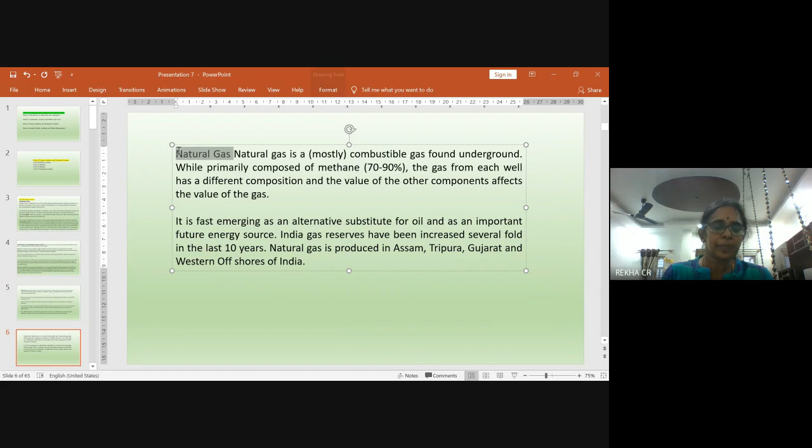The third one is natural gas. Natural gas is a combustible gas found underground, and primarily it is composed of 70 to 90% methane.

So the gas from each well has a different composition, and the value of other components affects the value of gas. Natural gas is a fast emerging alternative substitute for oil and an important energy source for the future.

India's gas reserves have increased several fold in the last 10 years, and natural gas is produced in Assam, Tripura, Gujarat, and western offshores of India.

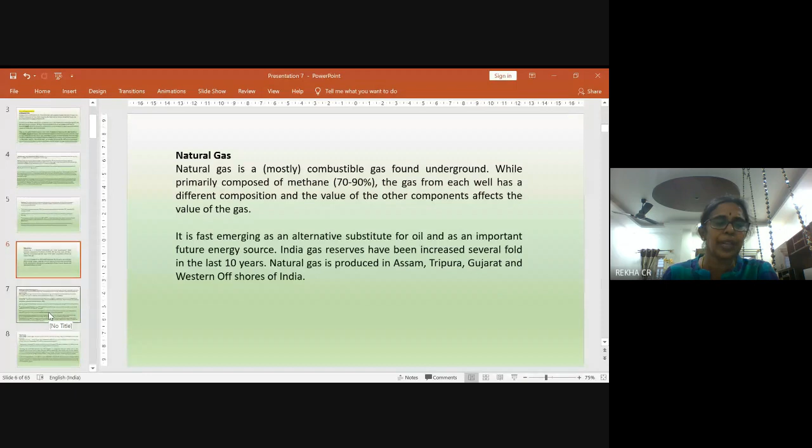Next, coming to renewable energy technologies or renewable energy sources. The one we studied earlier is non-renewable. Renewable energy sources can be renewed, like solar energy, wind energy, geothermal energy, tidal power, hydroelectric power, biomass, etc. The first one is wind energy.

It is an important alternative technology due to developments in turbine technology. The power generated from wind-based turbines has increased significantly. Wind energy is one of the clean and sustainable energy resources.

Though windmills are utilized for energy generation, the development of new windmills, also called wind turbines, appeared as early as 1890. Today, wind-generated electricity is very close in cost to power from conventional utility generation in some locations.

In wind energy, the wind turbines use the kinetic energy of the wind and convert it into mechanical energy, which is then converted into electricity by a generator. Large windmills are generally grouped together in a windy area, called a wind farm, which makes it easier to feed the produced electricity into the power grid.

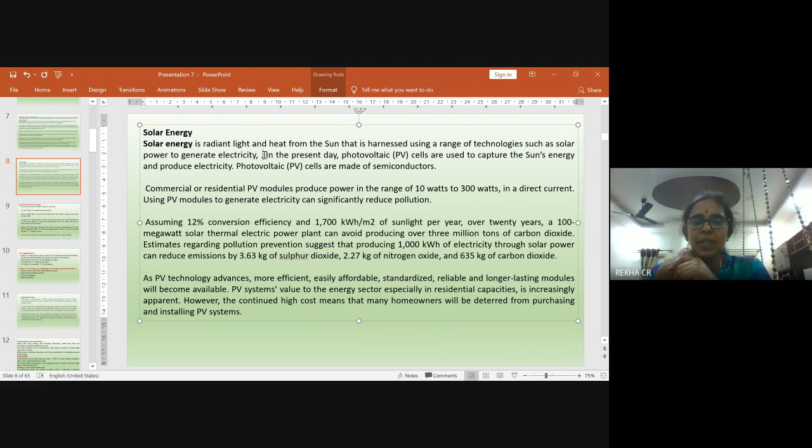As PV technology advances, more efficient, easily affordable, reliable, and long-lasting modules will become available. PV systems' value to the energy sector, especially in residential capacities, is increasing.

Next is photovoltaic technology. Photo means light and voltaic stands for electricity. So SPV refers to sunlight-derived electricity. When sunlight falls on special cells called solar cells, electric voltage and current are generated.

A single solar cell generates 1 watt of useful power, and even more depending upon its conversion efficiency. The power thus generated is fed to the battery and can be drawn whenever required.

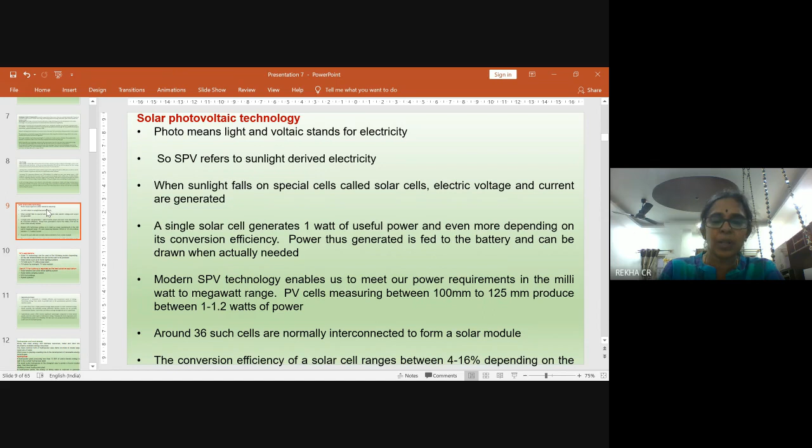SPV technology enables us to meet our power requirements. PV cells measuring between 100 to 125 millimeters produce between 1 to 1.2 watts of power. Usually 36 such cells are interconnected to form a solar module. The conversion efficiency of a solar cell ranges between 4 to 16%, depending upon the cell technology used.

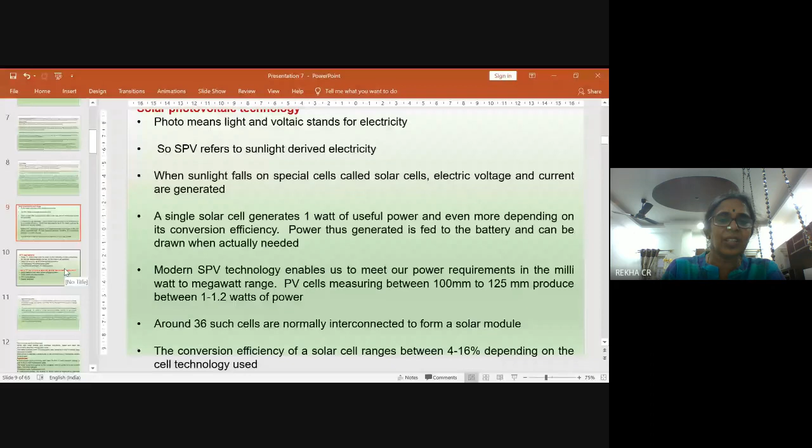This SPV technology is used depending upon site characteristics. It can stand alone in home lighting systems, PV grid as in PV utility power plants, or PV hybrid, that is PV wind system. It is used for lighting and finds its best application in solar lanterns, solar street lighting systems, solar water pumping systems, SPV for buildings, hybrid systems, etc.

Next one is hydroelectric power. Hydropower is one of the efficient, reliable, and economic sources of energy. Harvesting energy from water is possible due to the gravitational potential energy stored in water.

As the water flows from a high potential energy, that is high ground, to a low potential energy at lower ground, the potential energy difference created is partially converted into kinetic and then electric energy through the use of a generator.

Hydroelectric power has several significant advantages compared to fossil-based power, and it is also significant when compared to other sources of alternative energy.

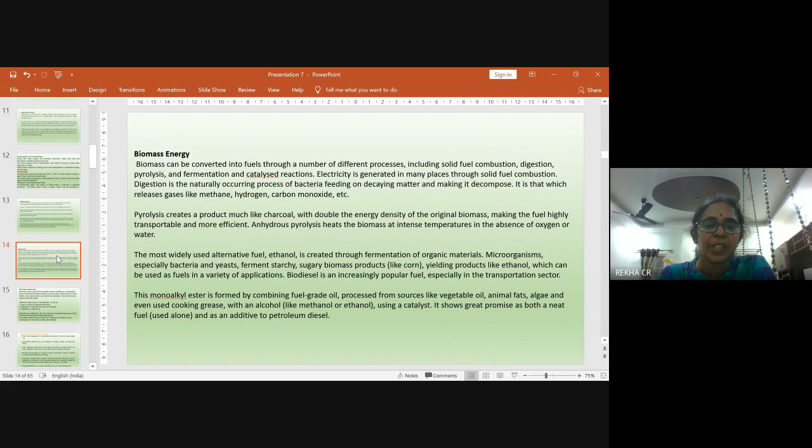These are some of the different types of energy. Biomass resources refer to plant-derived organic matter available on a renewable basis, which includes energy crops and trees, agricultural food and fodder crops, agricultural crop waste and residues, wood waste, and residues of aquatic plants. There are different ways to use biomass.

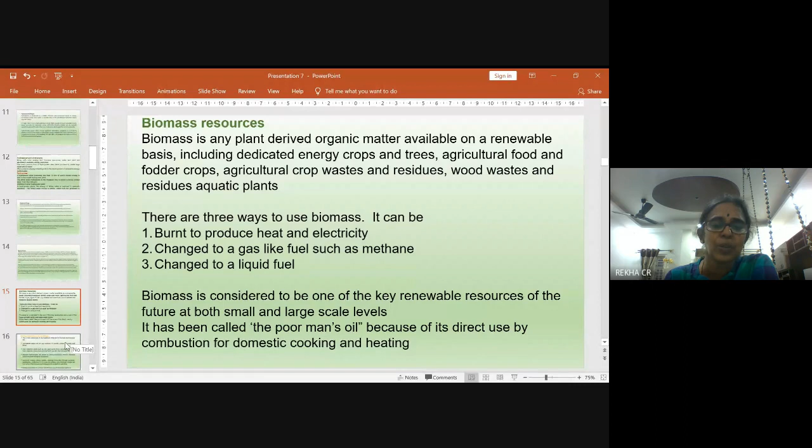Biomass can be directly burnt to produce heat and electricity. It can be changed to a gas-like fuel such as methane, or changed to a liquid fuel. It is one of the key renewable resources of the future at both small and large scale levels, and it has a number of advantages.

Biomass technologies are based on direct combustion, thermochemical and biological processing. Improved cooking stoves, boilers, charcoal production through pyrolysis, gasification, and production of biofuels like ethanol, biodiesel, and biogas are some of the biomass technologies and products used today. Biomass gasification is a cheap and efficient way of producing electricity.

Next is hydropower, which we have discussed. Along with solar energy and biomass resources, we have water and wind abundantly available, which can be used as energy sources.

Next is ocean energy. 70% of the Earth's surface is covered by oceans, which have the potential to supply humans with an enormous amount of renewable energy. Humans have exploited the energy potential of Earth's oceans by taking advantage of wave movement, tides, ocean currents, and ocean thermal energy.

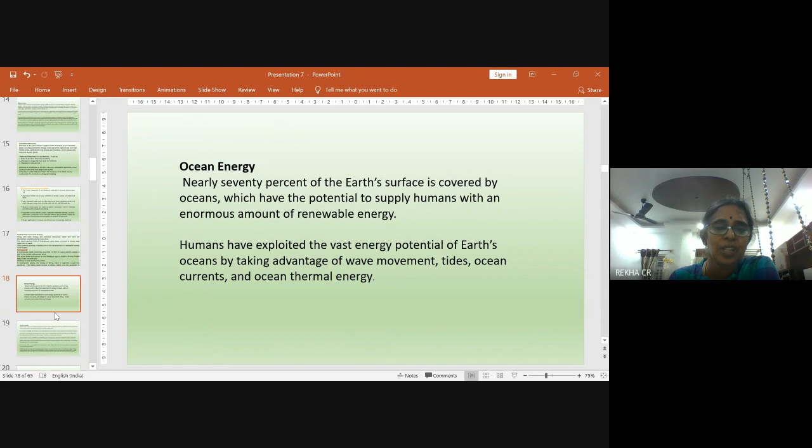Next is nuclear energy. Nuclear energy is the use of nuclear reactions that release nuclear energy to generate heat, which is most frequently used in steam turbines to produce electricity in a nuclear power plant.

Nuclear power can be obtained from nuclear fission, nuclear decay, and nuclear fusion reactions. Presently, the majority of electricity from nuclear power is produced by nuclear fission of uranium and plutonium. Generating electricity from fusion power remains at the focus of international research.

Nuclear power is also a clean and efficient way of boiling water to make steam, which turns turbines to produce electricity. Nuclear power plants use low enriched uranium fuel to produce electricity through a process called fission, the splitting of uranium atoms in a nuclear reactor.

Nuclear power offers many benefits for the environment. The power plants don't burn any materials, so they produce no combustion byproducts, and they do not release any greenhouse gases. This protects air quality and mitigates climate change.

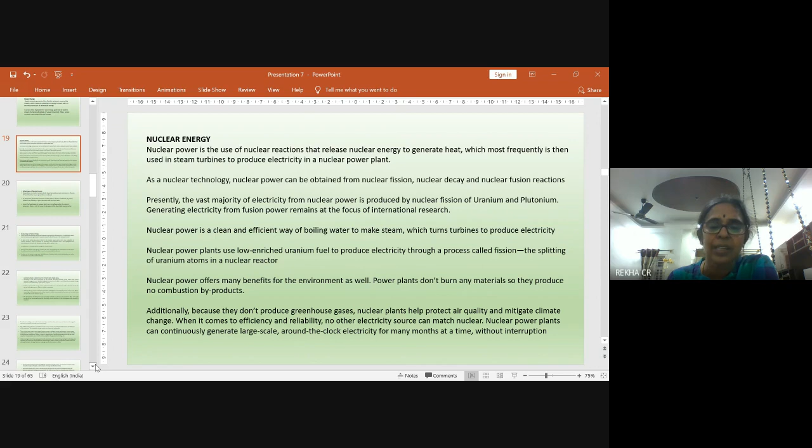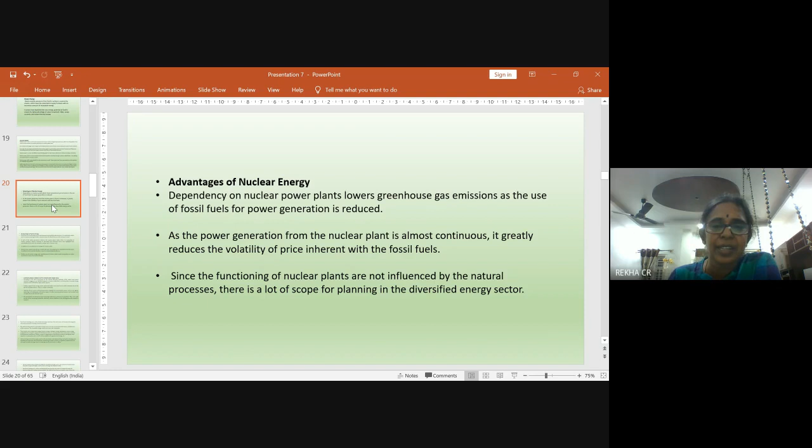Nuclear power plants can continuously generate large scale, around the clock electricity for months at a time without any interruption. So what are the advantages of nuclear energy? It is available 24 hours, the power generation is there, and it is not influenced by natural processes. There is a lot of scope for planning a diversified energy sector, and there is no greenhouse gas emission.

What are the disadvantages of nuclear energy? Fossil fuels are used mostly in road transport and mobility infrastructure, so switching over to nuclear power generation may not reduce fossil fuel use in the transport sector. In spite of all safety precautions in nuclear power plants, there is a probability of nuclear accidents.

Nuclear accidents at Chernobyl and Fukushima highlighted the vulnerability of the plants to accidents, particularly due to human error. Nuclear power plants also have a limited lifespan, and the establishment of such plants must be both technically feasible and economically feasible.

The use of nuclear energy and establishment of nuclear plants involves dependency on other countries for nuclear fuel and technology.

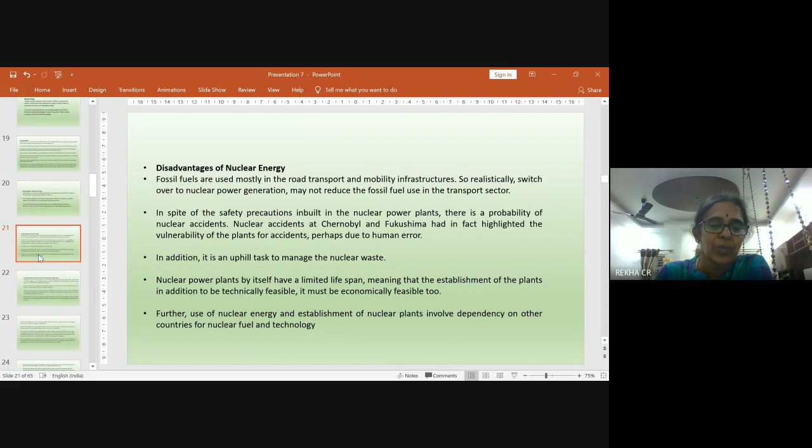Diversification in energy supply perspectives from India: according to the Central Electricity Authority, India's total power capacity is pegged at over 300,000 megawatts, of which 42,850 megawatts is contributed by renewable energy projects and 42,783 megawatts by hydropower projects.

Experts from the energy sector are of the opinion that India is very much on its path to become one of the world's leading producers of green energy. India has a diverse source of power generation, ranging from conventional sources such as coal, lignite, natural gas, oil, hydropower, nuclear power, and non-conventional sources like wind, solar, agriculture, and domestic waste.

The demand for electricity has been increasing rapidly due to the increase in population. In order to cater to the increasing demand for electricity, massive additions to the existing generation capacity are very much required. The shift from fossil fuels to renewable energy sources is due to environmental impact, and of course these sources of energy are clean and sustainable.

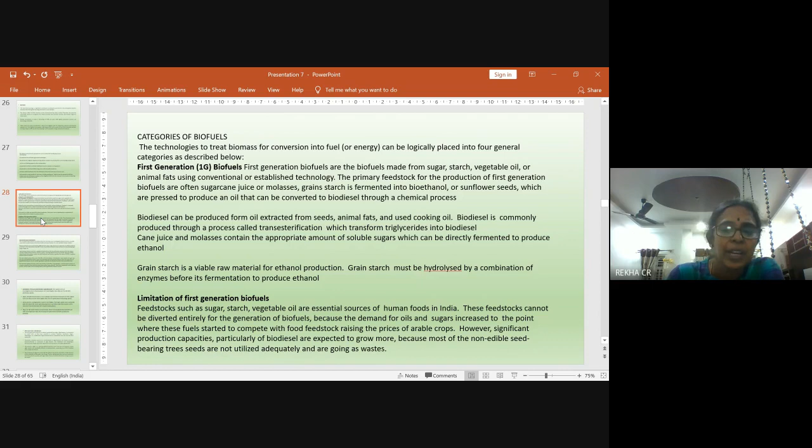The limitation for first generation biofuels is that feedstocks such as sugar, starch, and vegetable oil are essential sources of human food. These feedstocks cannot be diverted entirely for generation of biofuels because the demand for oils and sugars increased to the point where these fuels started to compete with food feedstock, raising the prices of arable crops. However, significant production capacities, particularly of biodiesel, are expected to grow more because most of the non-edible seed bearing tree seeds are not utilized adequately and they go to waste.

The second one is second generation biofuels, called 2G biofuels. They are produced from non-food crops, which include lignocellulosic biomass, the residues of crops, or waste biomass in the form of straw, stalks of wheat, rice, corn, etc. Biomass feedstock can be converted into different fuels using a range of processes to generate cost-effective biofuels, such as biomethanol, bio-DME, Fischer-Tropsch diesel, biodiesel, mixed alcohol, bio-oil, biohydrogen, syngas, biogas, etc.

Lignocellulosic biomass is one of the most abundant plant materials on earth, obtained from farm residues, the organic fraction of municipal solid waste, and industrial and urban residues. The chief fraction of this biomass, typically 35 to 50%, is a glucose polymer known as cellulose; next, 22 to 35% is hemicellulose. Depending upon the distribution of these sugars, the biomass also varies. The third most significant fraction, 15 to 25%, is lignin. These components, cellulose, hemicellulose, and lignin, can be broken down to form sugar molecules. Some other compounds such as plant oils, proteins, and ash make up the remaining fraction of the lignocellulosic biomass structure.

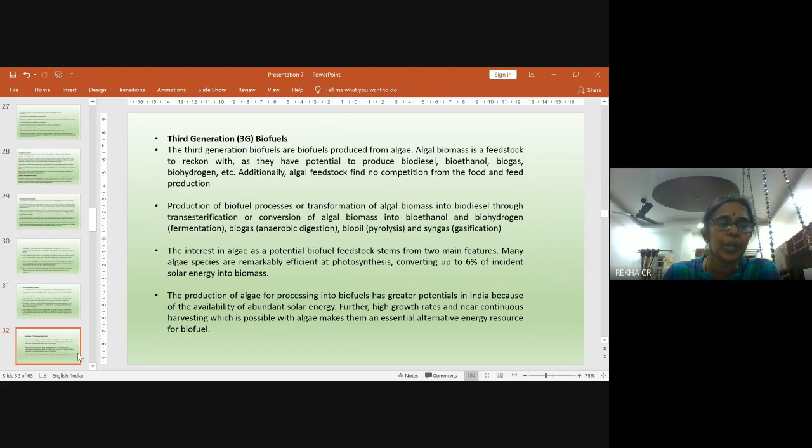The high growth rates and near continuous harvesting possible with algae make them an essential alternative energy resource for biofuel. So the limitation for this...

...third generation biofuel. So the biofuels from the third generation sources have limitations in terms of economic performance, ecological footprint, reliance on sunlight, geographical allocation, and inadequacy to substitute for fossil fuels.

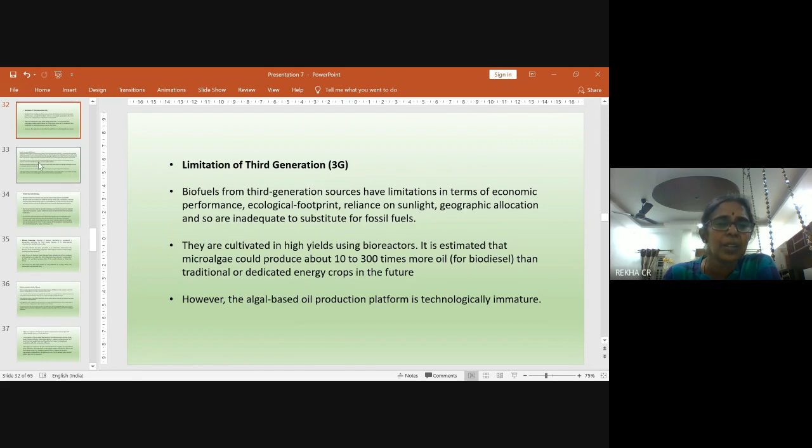So they are cultivated in high yields using bioreactors. It is estimated that microalgae could produce about 10 to 300 times more oil than traditional or dedicated energy crops in future. But still, algal based oil production is a technologically immature technology.

So next one is 4G, the fourth generation biofuels. The fourth generation biofuels are a step further from the third generation biofuels. It is mostly based on metabolic engineering, a powerful tool to improve biofuel production either through genetic modification...

...to increase the carbon dioxide capture and lipid production, as well as to develop low input, fast growing energy crops with reduced fertilizers, insecticides, and water requirements.

Many efforts have been made to develop fast growing, high yielding trees, also designed to sequester more carbon dioxide and make the promise of carbon negative biofuels.

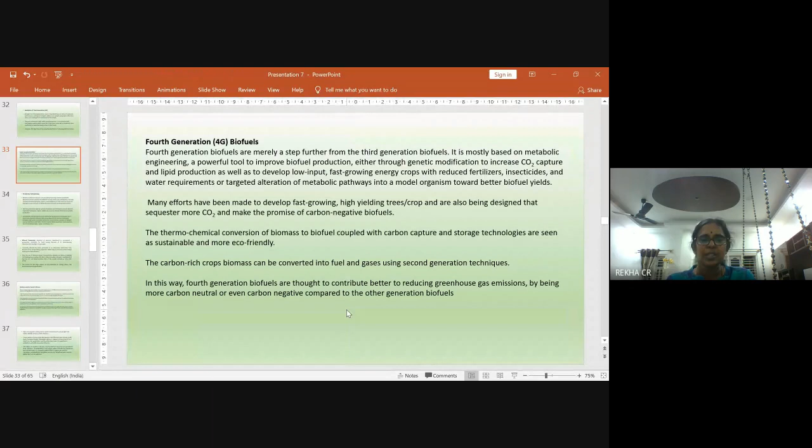So the thermochemical conversion of biomass to biofuel, coupled with carbon capture and storage technologies, is seen as sustainable and more eco-friendly. So carbon rich crops can be converted into fuel and gases using second generation techniques.

By this way, the fourth generation biofuels contribute better to reducing greenhouse emissions by being more carbon neutral or even carbon negative compared to other generation biofuels.

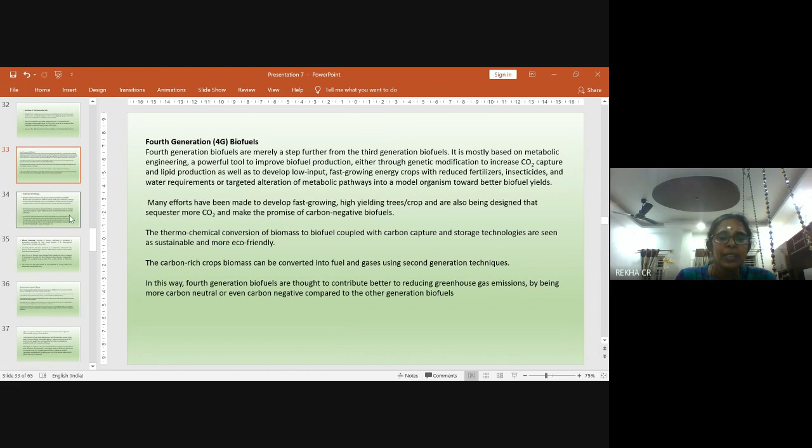So biofuels made from biomass are attracting increasing interest worldwide. They can fulfill new energy needs and contribute to energy security, mitigation of greenhouse gas emissions from the transport sectors, and delivering rural economic development benefits.

So the first generation has specific limitations in feedstocks used for biofuels, especially food grains, sugars, edible oil, etc. These food substances cannot be diverted entirely for biofuel production.

The second and third generation technologies have enormous potential because they are produced from biomass feedstock, that is residues and waste materials, and can be converted into varieties of biofuels.

So next one is ethanol production, or biomass bioethanol, considered as a substitute for fossil energy because of its clean burning characteristics and high octane value.

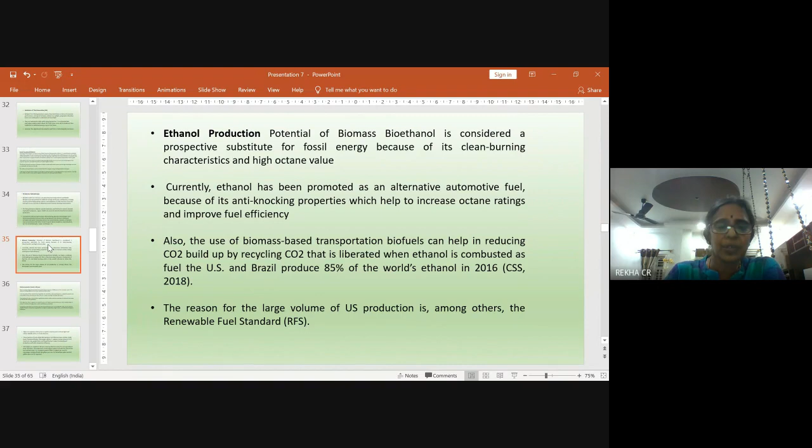The biomass based transportation biofuels help in reducing carbon dioxide buildup by recycling the carbon dioxide that is liberated when ethanol is combusted as fuel. So the reason for the large volume of US production is the renewable fuel standard.

So biodiesel production potential of biomass: there is a strong energy demand which is bound to happen because of the difference in economic sectors. Using biodiesel in place of petrol diesel significantly reduces carbon emissions and toxic air pollutants from on-road and off-road applications.

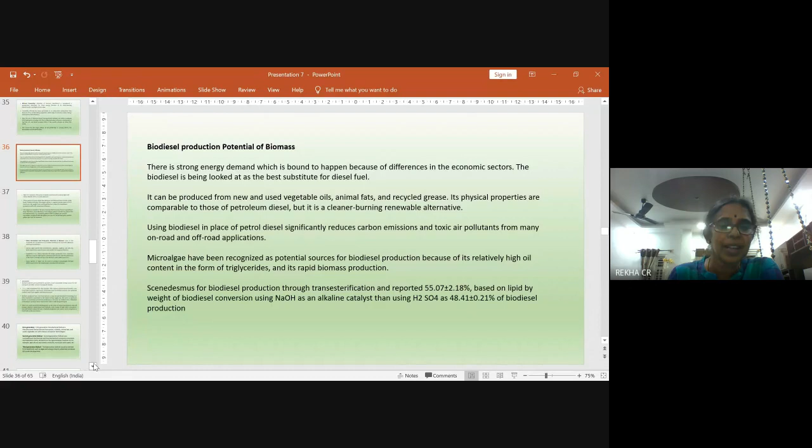So microalgae have been recognized as a potential source for biodiesel production because of its high oil content in the form of triglycerides and rapid biomass production.

Algae are aquatic organisms that grow using light and carbon dioxide. Many species of green algae like Spirogyra and Chlorococcum contain high levels of polysaccharides, and these are capable of growing all year round using non-agricultural land.

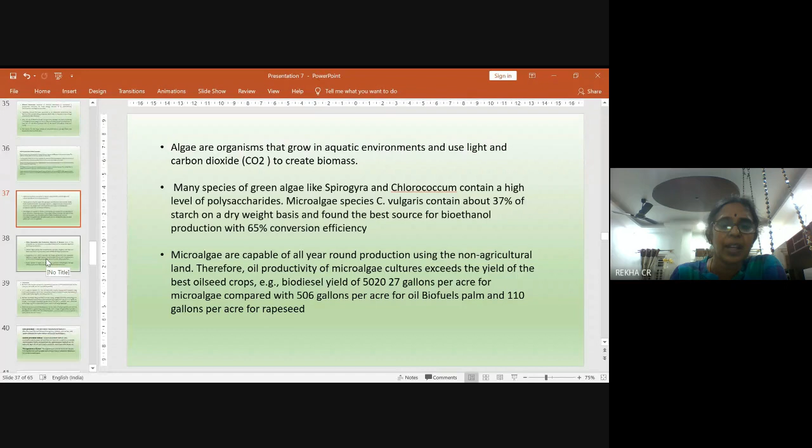Therefore the oil productivity of microalgae exceeds the yield of the best oil seed crops. So the other renewable fuel production potential of biomass includes seaweeds.

Seaweeds are considered an excellent feedstock for anaerobic digestion and biogas production. Various algae species like Scenedesmus, Spirulina, Euglena, and Ulva have been reported as good sources suitable for biogas production.

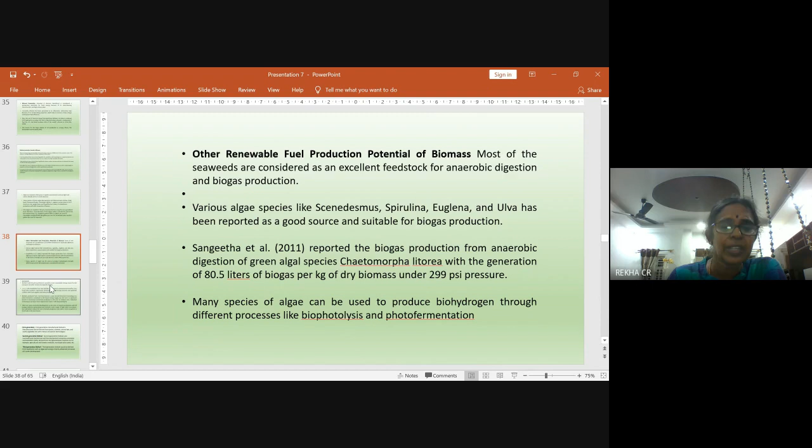Some green algal species like Chaetomorpha litorea generate 80.5 liters of biogas per kg of dry biomass under 299 psi pressure. So there are a number of algae and seaweeds which can be used as a potential source of biofuel.

So to conclude the second unit, biofuels hold the greatest potential to provide a more sustainable energy source for the transport and other sectors if produced sensibly.

Biofuels offer several environmental benefits over fossil fuels. The 1G biofuels have increasing concern over potential conflicts with food supplies and land production. So biofuels of 2G and 4G biofuel technology have been reviewed to contribute to future energy, and there are many successful developments in enzyme production and cell biology related to generating more biofuels, which will further reduce the cost of biofuel production and make it more competitive with fossil fuels in the near future.

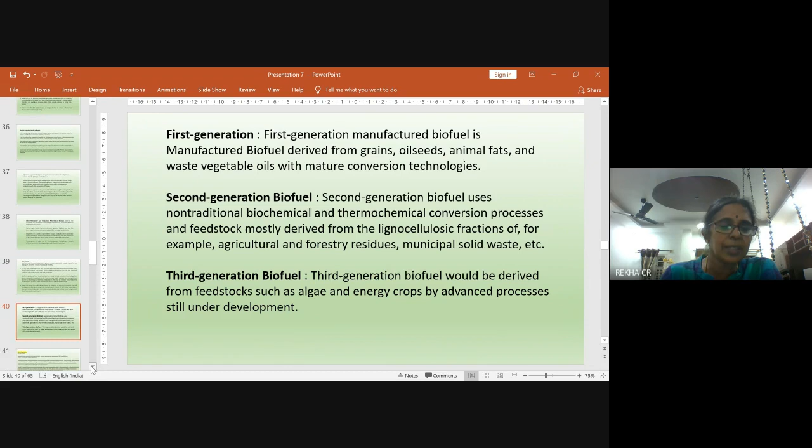So that concludes the second unit. The third unit is industry.

Industrial processes are highly energy intensive, accounting for approximately 30% of global energy consumption. Industrial processes and technologies are driven by energy. Processes such as metal smelting and chemical manufacturing, in addition to using enormous amounts of energy, emit greenhouse gases like methane and nitrous oxide. Certain fertilizer plants, iron and steel industries, petroleum refining plants, cement factories, and paper and pulp mills are the important energy consuming industries.

Socio-economic development drives energy consumption to rising production in industrial subsectors like iron and steel, pulp and paper mills, etc. In this decade, India has experienced its highest growth rate in industrial energy consumption, while China experienced remarkable growth in the industrial sector.

An in-depth study of industrial sectors would throw light on the life cycle emissions, help reduce waste generation occurring during manufacturing and construction, and develop strategies to adopt circular economy based industrial initiatives. In this unit, we are going to discuss the potential of the industrial sector in climate change mitigation.

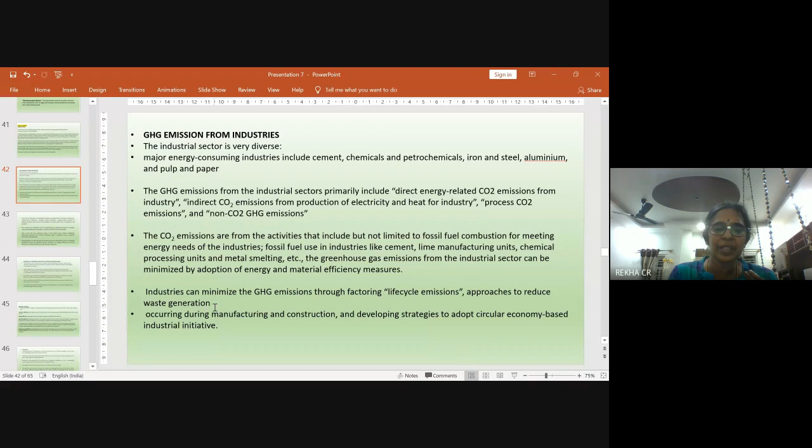Greenhouse gas emissions from the industrial sector can be minimized by adopting energy and material efficiency measures. Industry can minimize GHG emissions through life cycle emissions approaches to reduce waste generation occurring during manufacturing and construction, and by developing strategies.

The need of the hour is to develop strategies to improve emissions efficiency, material use efficiency, and product service efficiency, coupled with measures to reduce demand and increase the possibility to recycle and reuse materials and products. Material use efficiency can be adopted by following certain measures to reduce scrap and by designing new products that are efficient and sustainable.

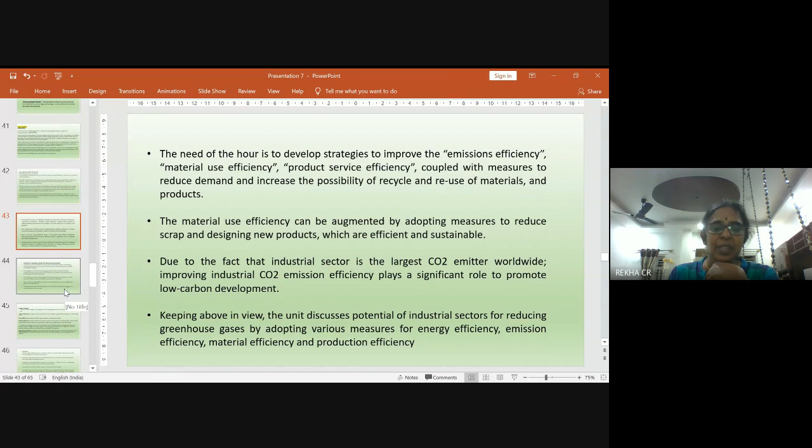The industrial sector is the largest carbon dioxide emitter worldwide. Improving industrial carbon dioxide emission efficiency plays a significant role in promoting low carbon development. Keeping this into account, this unit discusses the potential of industrial sectors for reducing greenhouse gases by adopting various measures for energy efficiency, emission efficiency, material efficiency, and production efficiency.

GHG reduction from the industrial sector demands innovative technologies and mitigation strategies. It can be achieved by adopting production-related and demand-related strategies. Production-related strategies aim to improve industrial process efficiencies, and demand-related strategies aim at reducing the demand for the product, such as the demand for materials like steel and cement.

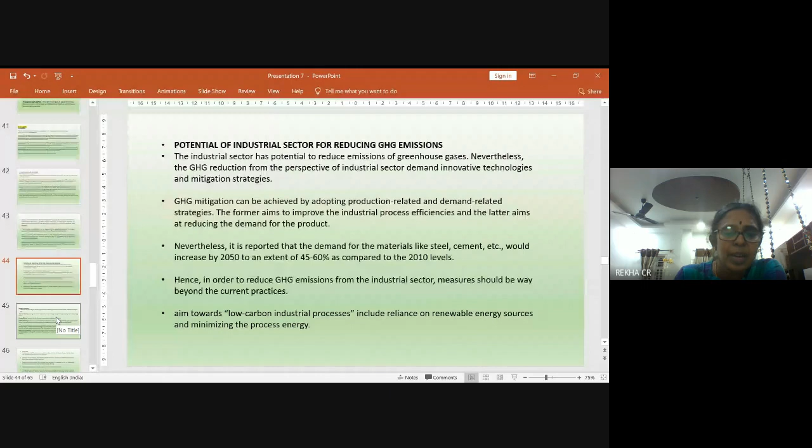This demand would increase by 2050 to an extent of 45 to 60% as compared to 2010. Hence, in order to reduce GHG emissions from the industrial sector, measures should go way beyond current practices. The aim towards low carbon industrial processes includes reliance on renewable energy sources and minimizing process energy.

So what are the mitigation strategies? How do we reduce emissions? Production-related strategies are mainly geared towards improving industrial process efficiency. Three main strategies are emission efficiency, energy efficiency, and material efficiency.

Emission efficiency means reducing the amount of emissions per unit of energy used by switching to low carbon energy sources. Energy efficiency means improving the ratio of energy consumption to production of materials. Material efficiency means reducing the amount of raw material needed to create a product.

Demand-related strategies are focused on reducing the overall use of product material by changing the demand for industrial products. These strategies include reuse, recycling, substitution with less energy and GHG intensive materials, and using materials more efficiently. The demand-related strategies also include product service efficiency, using products for longer and more intensely, which can help reduce the amount of product created.

And the demand reduction, reducing the overall demand for new products, for example through reuse and recycling, will reduce the emissions. So to conclude the third unit, limiting industrial carbon dioxide emission is crucial to reduce the risk of climate change, but it looks very challenging and warrants policy attention.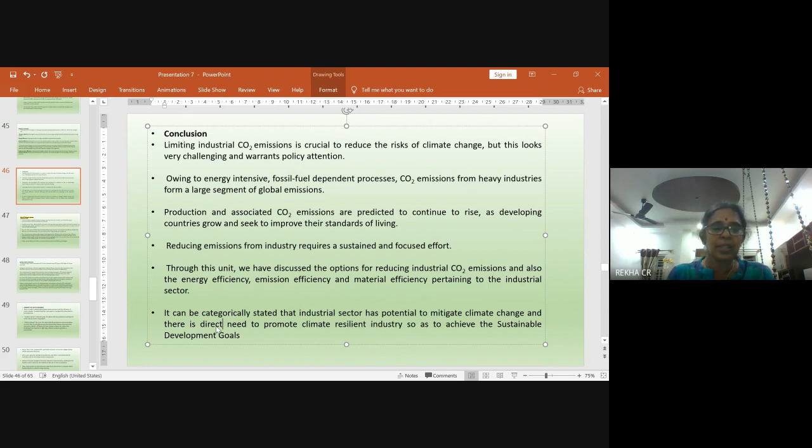The options for reducing industrial carbon dioxide emissions, and also the energy efficiency pertaining to the industrial sector, have been discussed in this unit. The industrial sector has potential to mitigate climate change, and there is a direct need to promote climate resilient industry in order to achieve the sustainable development goals. This is about how industry can reduce greenhouse gas emissions, especially carbon dioxide.

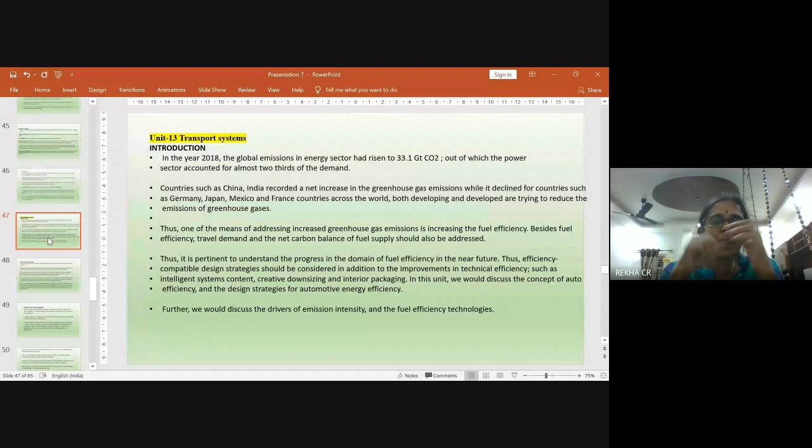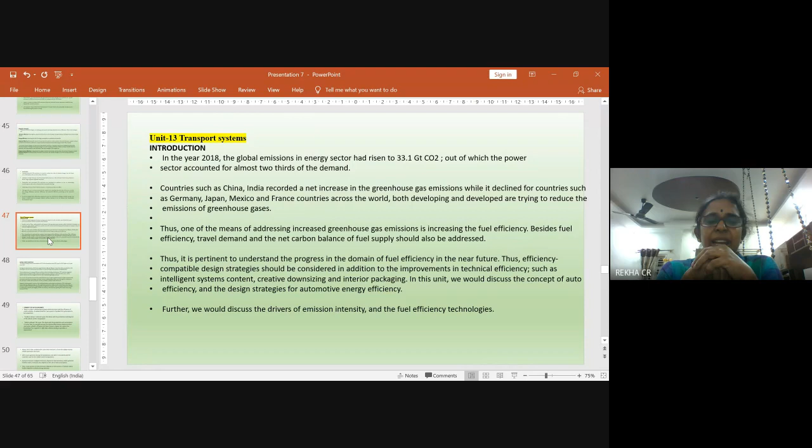So the thirteenth unit is transport system. In the year 2018, global emissions in the energy sector rose, out of which the power sector accounted for almost two-thirds of the demand. Countries such as China and India recorded a net increase in greenhouse gas emission, while it declined for countries such as Germany, Japan, Mexico, and France.

Across the world, both developing and developed countries are trying to reduce the emission of greenhouse gases. One of the means of addressing increased GHG emissions is increasing fuel efficiency. Apart from fuel efficiency, travel demand and the net carbon balance of fuel supply should also be addressed. To understand progress in fuel efficiency, efficiency compatible design strategies should be considered in addition to improvements in technical efficiency. Further in this unit, we will discuss the drivers of emission intensity and fuel efficiency technologies.

The global average annual concentration of carbon dioxide in the atmosphere was 407.4 ppm in 2018, higher by 2.4 ppm since 2017. During pre-industrial times, carbon dioxide levels ranged between 180 to 280 ppm. Since then, carbon dioxide concentration has been continuously increasing as a result of rising industrialization and globalization.

Due to advancement in energy efficiency and low carbon technology deployment, carbon dioxide emissions stagnated despite expansion in the global economy. However, despite growth in coal use, fuel switching between coal and gas accelerated in 2018, reducing the carbon intensity of global energy use. This switch was prominent in China and US, which reduced emissions by 45 and 40 MT respectively. Energy from renewable sources and nuclear plants has helped in reducing the emission load slightly.

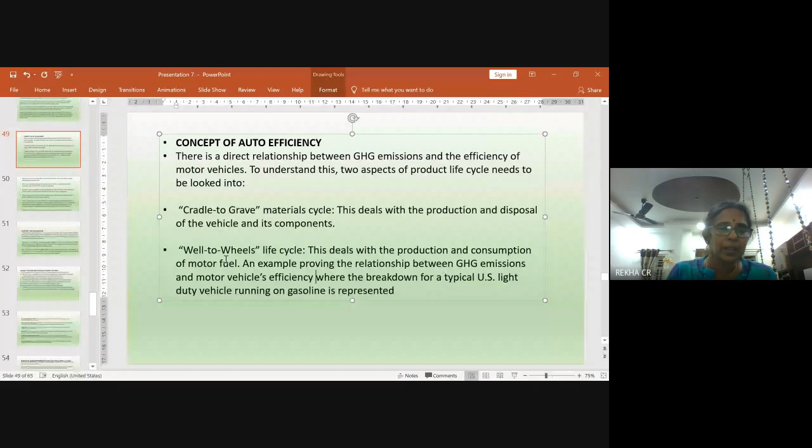An example proving the relationship between GHG emissions and motor vehicle efficiency shows the breakdown for a typical US light duty vehicle running on gasoline. About 70% of the combined life cycle GHG emissions is from the tailpipe during vehicle operation, that is end-use operation. End-use emissions depend on fuel chemistry, while upstream emissions depend on the rate of fuel consumption. So the major portion of GHG emissions depends on the fuel systems of vehicles, which further depend on vehicle energy intensity. If automotive end-use efficiency can be improved, then great reductions in GHG emissions can be achieved.

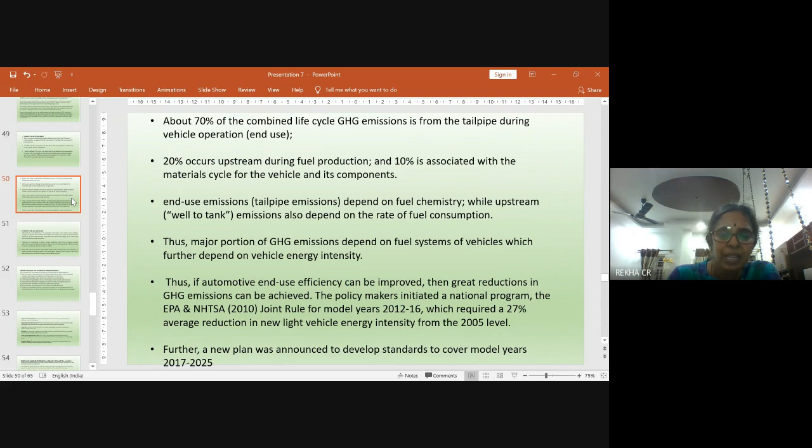Further, a new plan has been announced to develop standards covering the model years 2017 to 2025, addressing efficiency and GHG emissions. Although auto efficiency is an important parameter, it alone cannot address the energy and climate issues.

Automobiles are not the sole mode of transportation. Besides their efficiency, travel demand and the fuel supply system determine the oil demand and GHG emissions. So in order to address vehicle regulations, which focus on efficiency within a policy framework for addressing climate change issues, vehicle efficiency needs are linked to targeting overall greenhouse gas reduction.

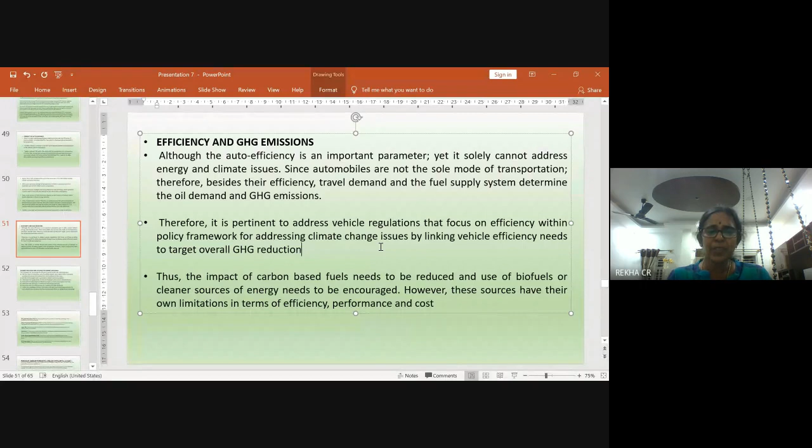The impact of carbon-based fuels needs to be reduced, and use of biofuels or cleaner sources of energy needs to be encouraged. But these sources have their own limitations in terms of efficiency, performance, and cost. As for design strategies for automotive energy efficiency: firstly, to develop a set of baseline vehicle classes, either real or theoretical, that possess the attributes of that class; second, to identify the technology which reduces fuel consumption.

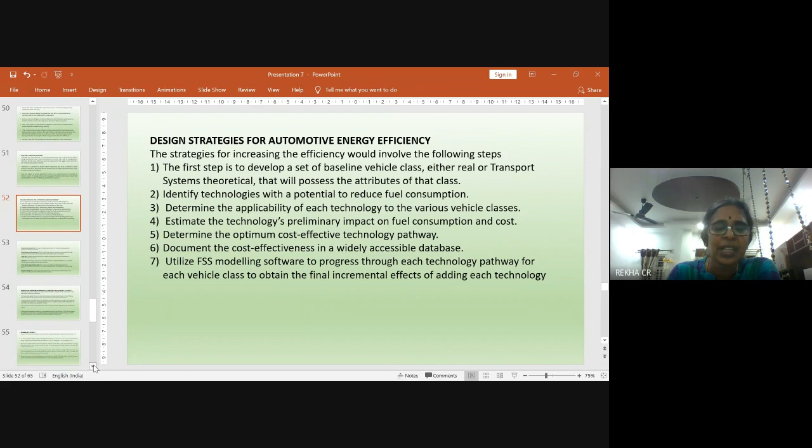Third, determine the applicability of each technology to the various vehicle classes. Fourth, estimate the technology's preliminary impact on fuel consumption and cost, determining the optimum cost effective option using a widely accessible database. Utilize FSS modeling software to progress through each technology pathway for each vehicle class to obtain the final incremental effects of adding each technology.

There are different types of modeling approaches, such as full system simulation, original equipment manufacturer trade-offs, calibration, partial discrete approximation, simulation models, and so on.

So the technology assessment can follow an incremental approach versus a fundamental analysis. The technology assessments are carried out to support setting standards, working from make and model level data characterizing technology modifications. The fundamental approach focuses on clean-sheet vehicle designs, improved performance levels, and efficiency potential.

Various studies have been carried out from time to time to study both the incremental approach and the fundamental analysis. With the advancement of technology, it is estimated that fuel efficiency could triple by 2035, increasing the performance of vehicles.

Although this program was terminated before its fruitful realization, PNGV concept cars using diesel hybrid powertrains were publicly displayed in January 2000. Energy efficiency across the globe increased in 2018, with global primary energy intensity falling by 1.3%.

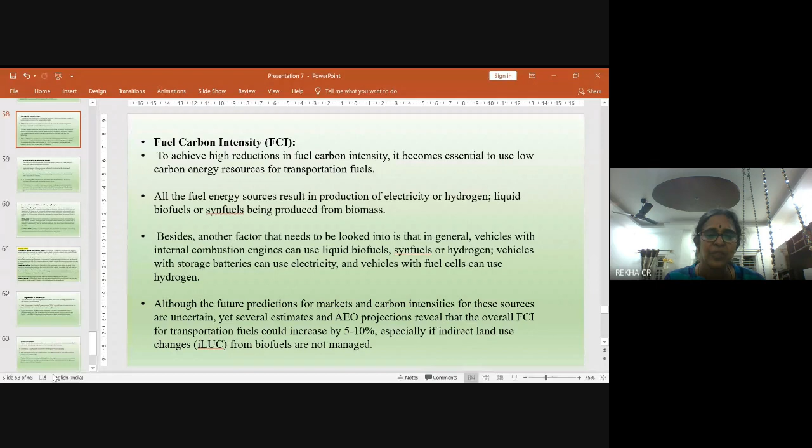Although future predictions for markets and carbon intensity for these sources are uncertain, several estimations and AEO projections reveal that overall fuel carbon intensity for transportation fuels could increase by 5 to 10%, especially if indirect land use changes from biofuels are not managed. Light duty vehicles represent the largest portion of world transport energy use and carbon dioxide emissions.

So in order to reduce fuel use and GHG emissions in vehicles, you can improve the conversion of fuel energy into useful work by improving drivetrain efficiency and recapturing energy losses, reducing loads from aerodynamic forces, rolling resistance, and losses associated with accelerating the vehicle and hill climbing.

Increasing drivetrain efficiency and recapturing energy losses is achieved by minimizing idling losses, drivetrain losses, overcoming inertia and braking losses, rolling resistance, aerodynamic drag, accessories, etc.

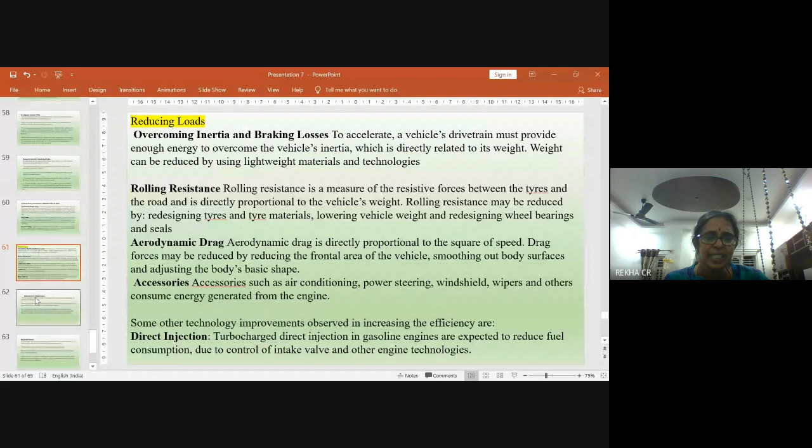Some other technology improvements observed in increasing efficiency: first is direct injection. Turbocharged direct injection in gasoline engines is expected to reduce fuel consumption by controlling the intake valve and other engine technologies. Advanced 6 and 7 speed automatic transmissions are being introduced for fuel economy improvements. Continuously variable transmissions, earlier limited to low power drivetrains, are gradually moving into large vehicles.

Hybrid electric drivetrains combine a conventional internal combustion engine with an electric drivetrain, and the battery is recharged by regenerative braking and engine charging. Plug-in hybrids obtain part of their energy from the electrical grid. Further, hybrids save energy by shutting down the engine, using the motor to boost power during acceleration, and shifting power steering and other accessories to electric operation for more efficient operation.

Regarding implications of climate cooperation, IPCC reports on climate change have continuously highlighted rising GHG emissions. New technologies are required not only to meet growing demand for vehicles, but also to reduce the impact on energy intensity in the transportation system.

A good example is electric vehicles, including battery electric vehicles and plug-in hybrid electric vehicles, which are fully or partially driven by electricity and thus emit less greenhouse gas. The solution calls for cooperation among the countries of the world to minimize the impact of climate change.

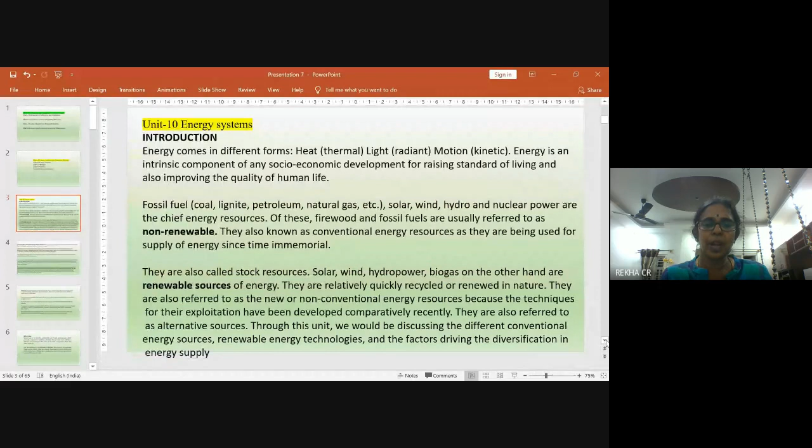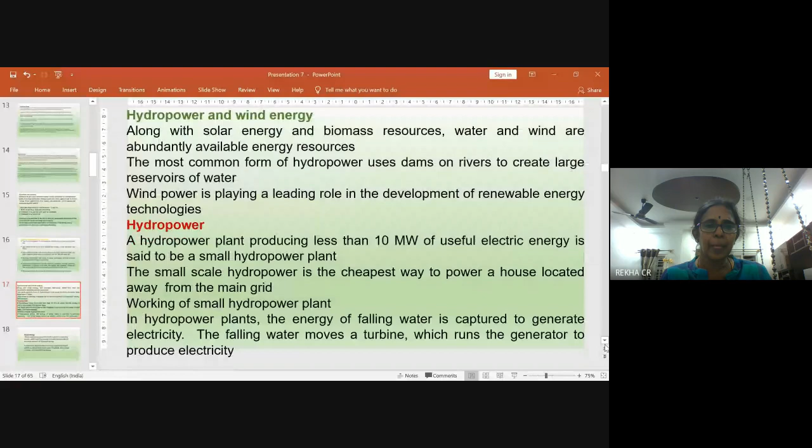The non-renewable sources are petroleum, coal, and natural gas. Renewable energy resources include wind energy, solar energy, hydropower, hydroelectric power, geothermal, biomass energy, ocean energy, and nuclear energy. This is about the first unit, energy.

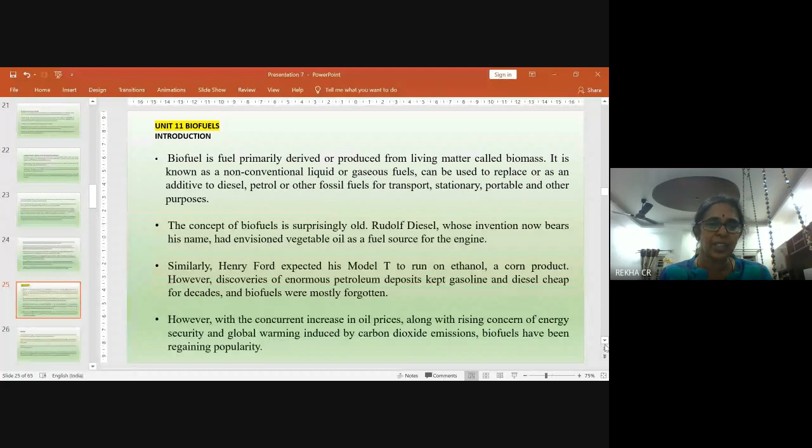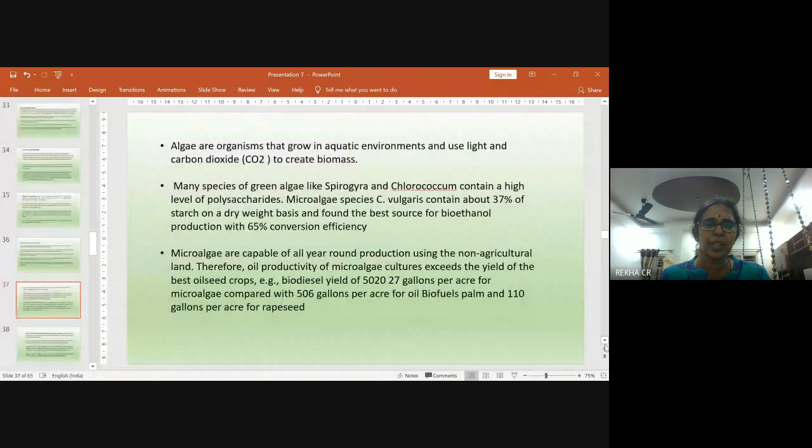The second unit is biofuels. There are different types of biofuels: first generation, second generation, third generation, and fourth generation, each with its own advantages and limitations. Also covered is the biodiesel production potential of biomass, then the conclusion of the second unit.

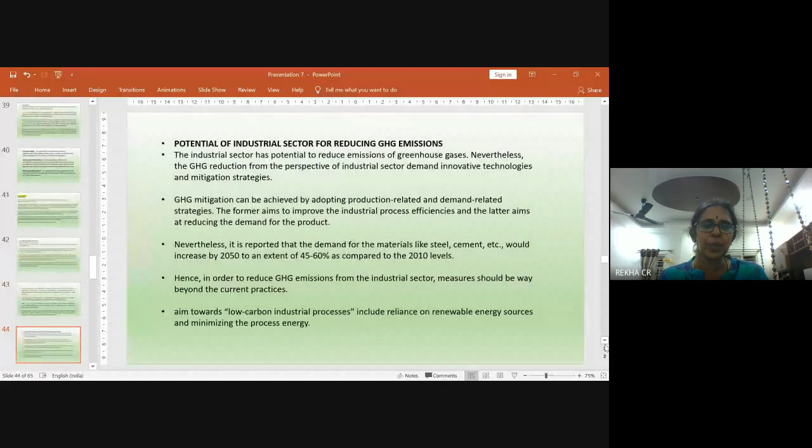The third unit is regarding industry. Here we study industrial processes, the various industries which emit greenhouse gases, and how to mitigate and adapt to these emissions, the GHG emission from industries, and the potential of the industrial sector for reducing greenhouse gas emissions. Mitigation strategies include emission efficiency, energy efficiency, and material efficiency.

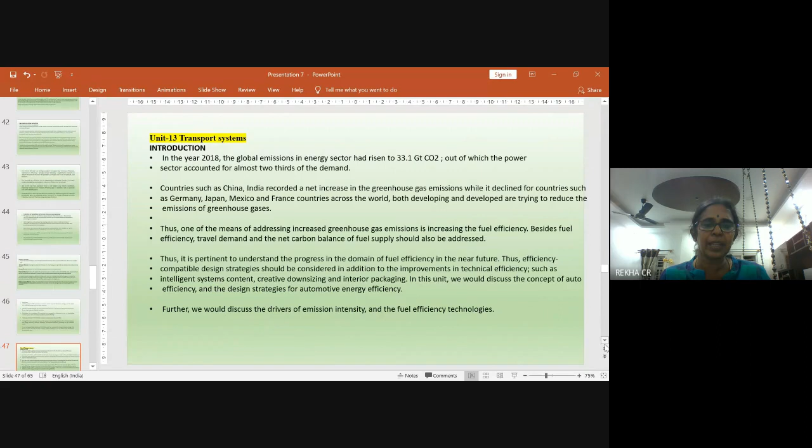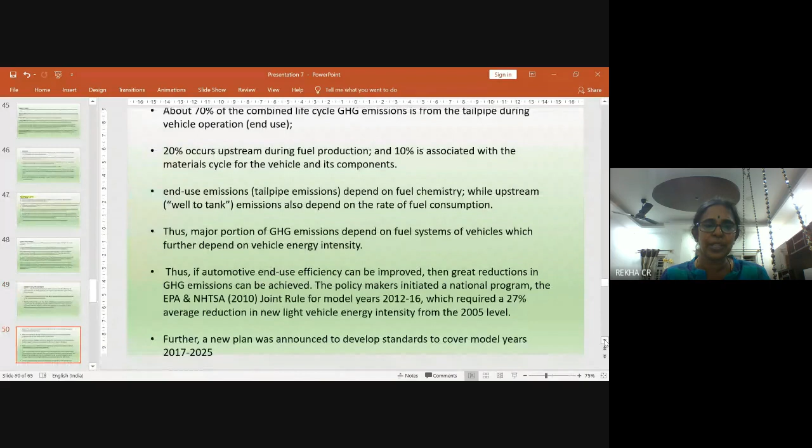The next unit is transport systems: global energy emissions, the concept of auto efficiency and GHG emissions, design strategies for automotive energy efficiency, technology assessment, incremental approach versus fundamental analysis, and emission intensity.

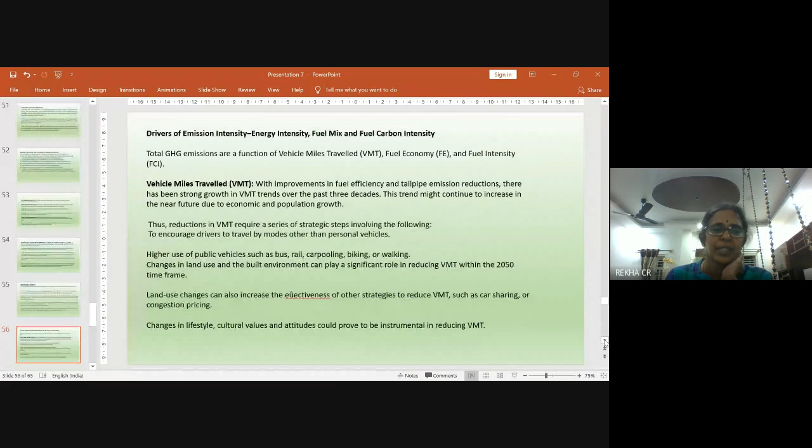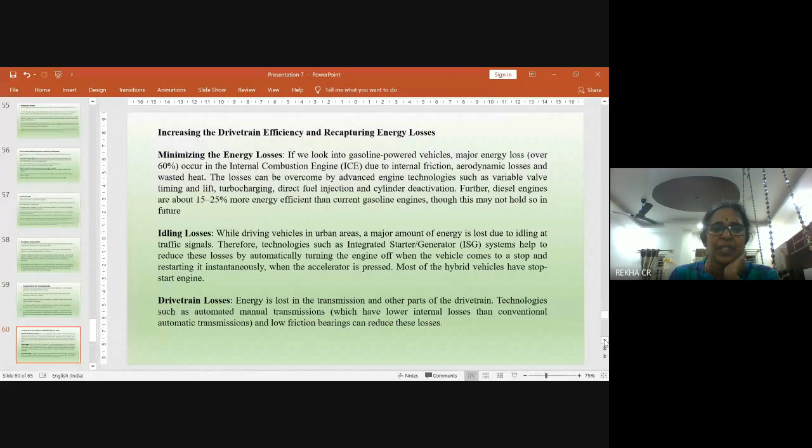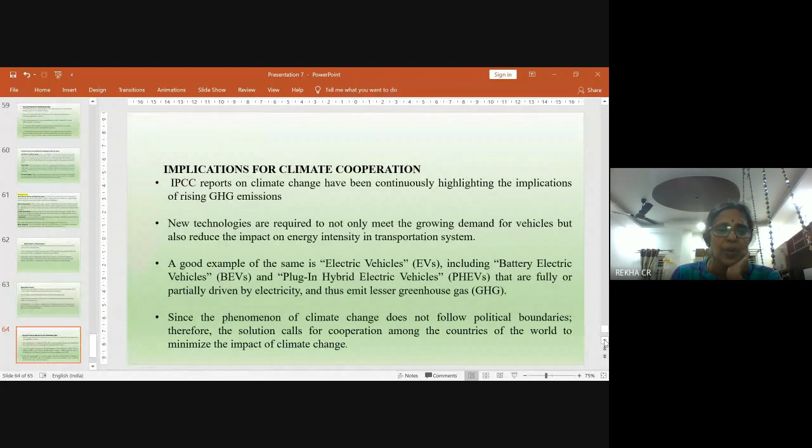Then drivers of emission intensity, that is energy intensity, fuel mix and fuel carbon intensity, fuel efficiency technologies, increasing drivetrain efficiency and recapturing energy losses, improvement in transmission, hybrid drivetrains, implications for climate cooperation, etc.

So today we have discussed the third block, that is energy, industry, and transport system.